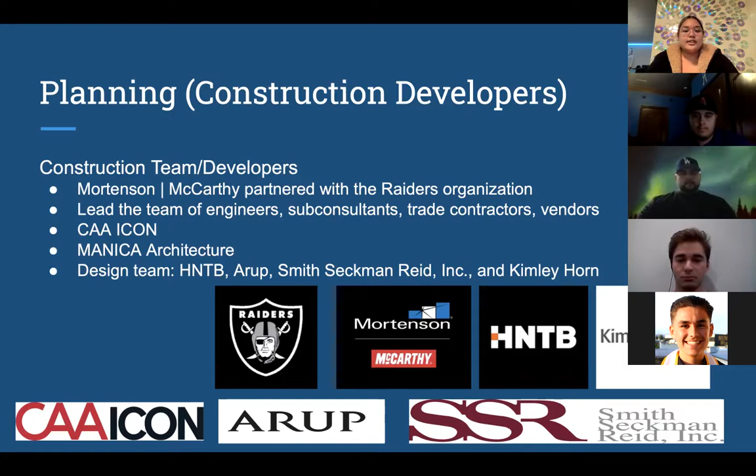For the permits, insurance, and building construction: for a construction project of this magnitude, with an estimated $1.97 billion invested, on a lot of 1.8 million square feet, the state lawmakers of Nevada had to vote on the proposal of building the stadium. Governor Brian Sandoval, governor of Nevada from 2011 to 2019, convened a special legislative session to consider the stadium proposal.

The permits obtained were from Clark County and had to comply with the LEED requirements. LEED stands for Leadership in Energy and Environmental Design, which is a huge factor in how new projects of this size are being built. I did not find any specific permits that needed to be obtained for a job this scale, but I can only imagine the extensive list of permits required.

There was 750 million out of the 1.97 billion dollars that was public funding from municipal bonds issued by Clark County, and the bonds were backed by proceeds of a special tax issued on hotels surrounding Las Vegas. So essentially the tourists were the ones paying for this to be built.

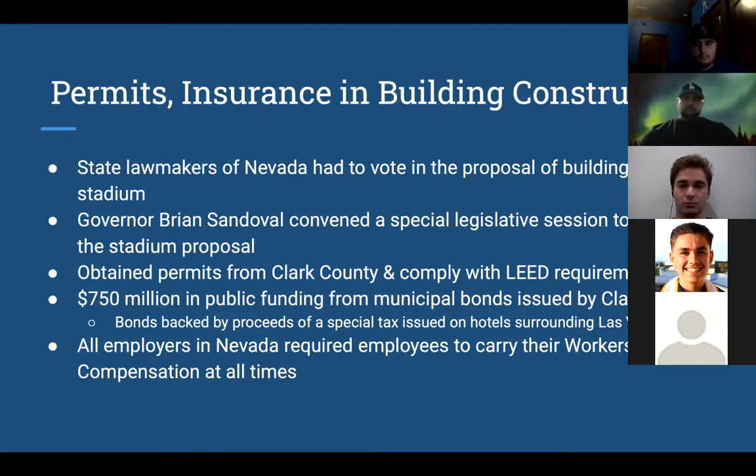For the site preparation and excavation, it required the blasting of caliche rock with dynamite to excavate and create the stadium bowl. Caliche rock is a sedimentary rock, basically a hardened natural cement with calcium carbonate that cannot be dug, so instead it needs to be blasted with dynamite.

This material can be found in the high plains of the western U.S. and other parts of the world, such as Australia, the Kalahari Desert, South Africa, and South American countries like Chile.

The dynamite explosions to excavate took place every day for nearly 2 months, with 300 holes drilled per day, moving 850,000 cubic yards of dirt. That's pretty much close to 18,000 holes blown up overall.

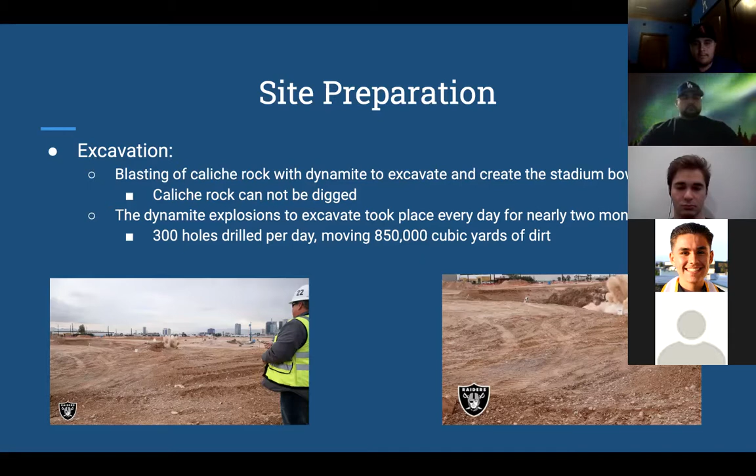For the site inspection, the stadium sits on a 62-acre site on Russell Road and Interstate 15. It's located in an unincorporated town within the Las Vegas metropolitan area, totaling 1.8 million square feet overall on where it sits.

As discussed on the prior slides, it was a joint venture with Mortenson Construction and McCarthy Construction, which carried out the whole development from start to completion. The utility lines were 30 feet deep from the stadium field elevation, with miles of piping and utility systems.

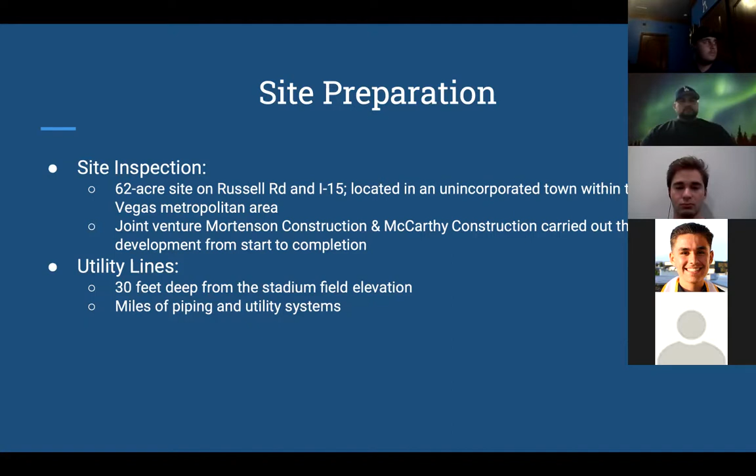The Allegiant Stadium is located near the world famous Las Vegas Strip in Paradise, Nevada. Geographically, it sits in a basin within the Mojave Desert and is surrounded by dry mountain ranges. This makes the climate mildly hot and dry.

The Allegiant Stadium was built on the desert. The stadium required the removal of 895,000 cubic yards of dirt.

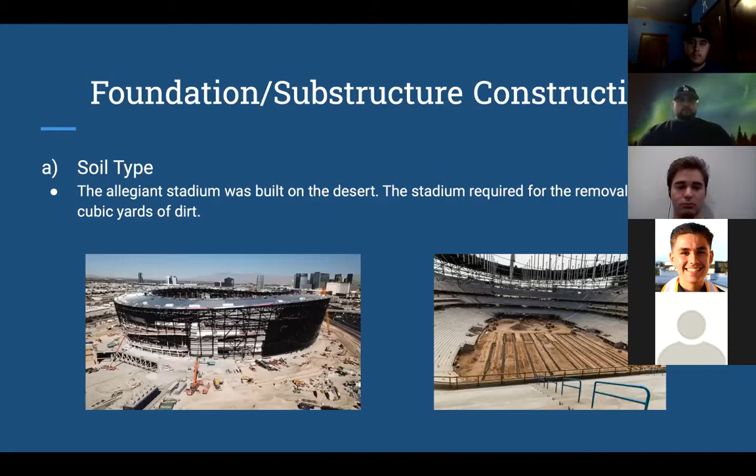The construction of the Allegiant Stadium began in November 2017 and finished December 2020, taking approximately 3 years to build. It required the removal of 895,000 cubic yards of dirt, the installation of 12 miles of concrete drilled shafts, and miles of piping and utility systems.

The roof was built with 100 stainless steel cables that created the structural diaphragm of the roof. The cable net system supports the steel structure of the fluorine-based ETFE roofing system. This roofing system provides an outdoor experience without exposing fans to the intense heat of the Nevada desert sun. The stadium also comes with a retractable field that contains an irrigation and drainage system.

Overall, 19 construction cranes were used throughout the project during the installation of 28,000 tons of structural steel, 105,000 cubic yards of concrete, and 482,000 structural bolts. Fun fact: the 28,000 tons of structural steel used to build the stadium is heavier than the Statue of Liberty.

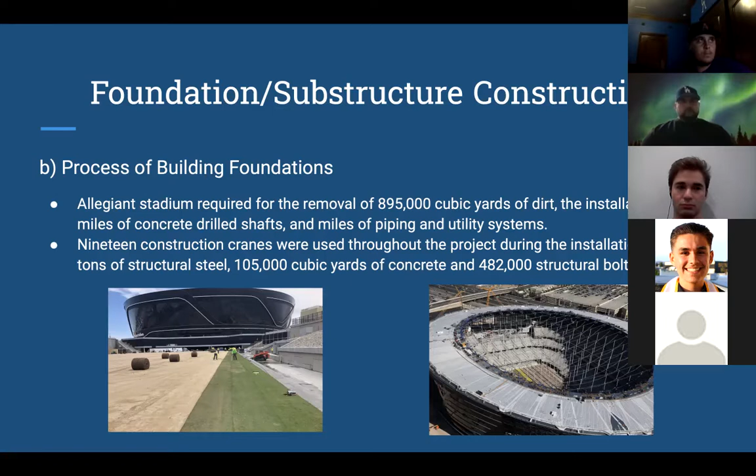The roles of the contractor: the builders were, as stated before, Mortenson Construction and McCarthy Building Company. The design architect was Manica Architecture, and the architect of record was HNTB.

Overall, Mortenson McCarthy performed all structural concrete, including foundations, walls, column cores, slab on metal deck, and slab on grade. The Allegiant Stadium was one of the fastest modern NFL stadiums ever built.

Mortenson and McCarthy used a team of 200 firms and digital modeling to be efficient and provide the best performance. The job was finished by the expected deadline due to technology-enabled construction techniques and effective collaboration among project team members. The Allegiant Stadium was built using a design-build approach.

This meant that the owner contracts with one entity instead of the designer and builder separately. This provided collaborative recommendations that fit the schedule and budget, and potential changes are evaluated by the entire team, leading to group-focused problem solving.

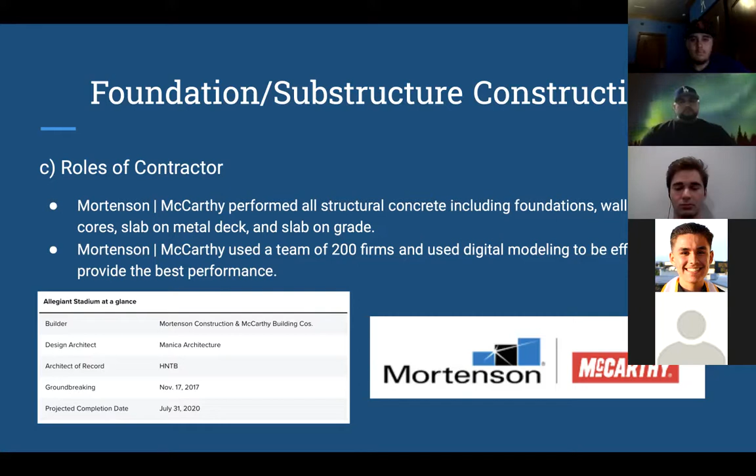Now moving on to the superstructure, which consists of 4 elements, starting with the electric and water line connections. As mentioned before, 895,000 cubic yards of dirt was excavated, there were miles of piping and utility systems, and 482,000 structural bolts used on this stadium.

Self-performed all the structural concrete, including foundation walls, columns, cores, slab on metal deck, and slab on grade. There are 1,111 toilets in the whole stadium.

There are 44 escalators, 2,200 TVs, 75,000 square feet of video boards, 95,000 square feet of field event space, and 100 yards of turf for the field, obviously.

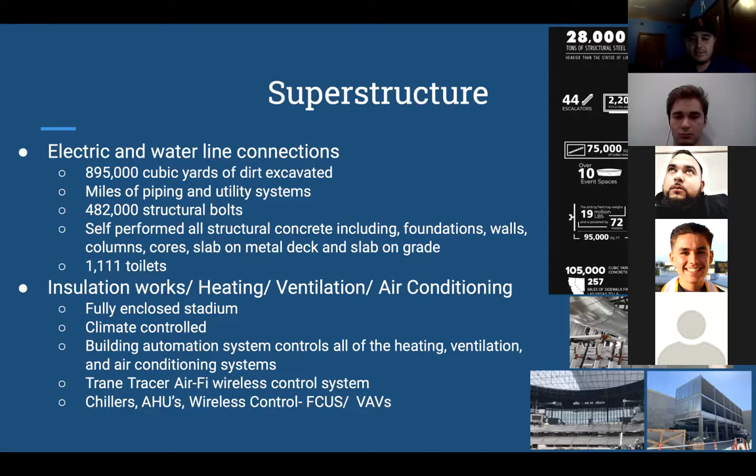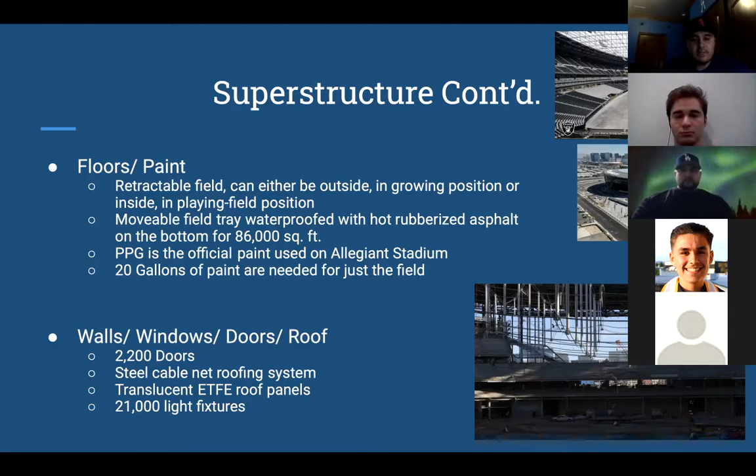So implemented here, first of all, the biggest element that basically no other stadium has is a retractable field, and then a stadium tour so you guys can get a better picture of what the stadium actually looks like during construction as well.

So this is the retractable field.

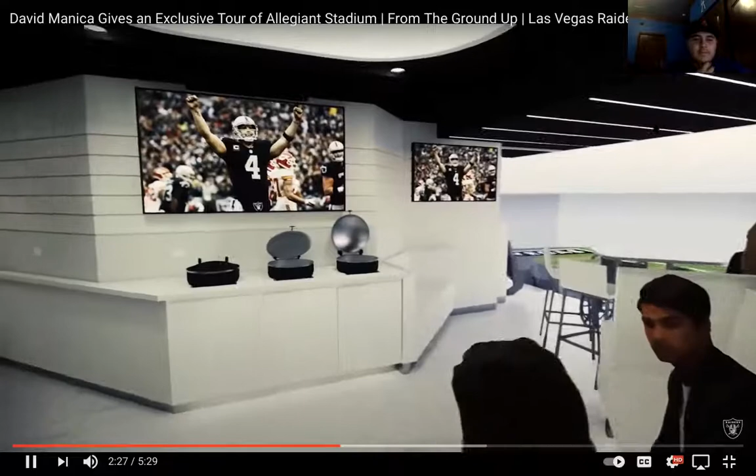All right, since the recording isn't really working, I guess I'll just talk through it. So right now he's just showing the suites and how they designed it to make it a little bit more spacious while still including a lot of suites, because the owner actually wanted a various amount of suites for fans to get a luxury experience.

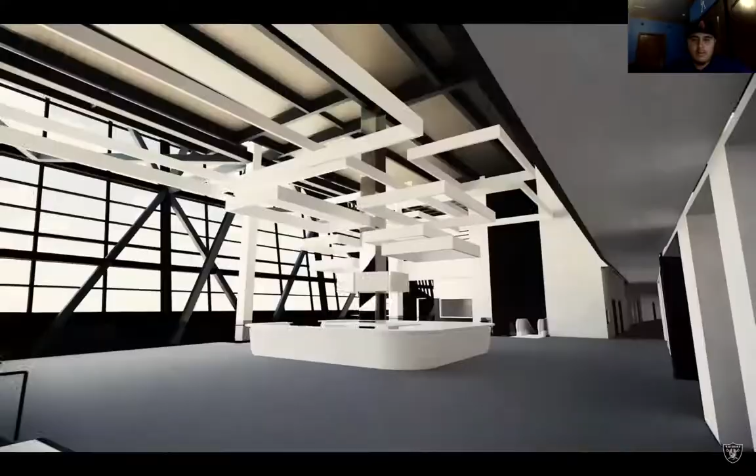So here what we can see is the field level, and these are just the designs. I mean, you could tell that that's luxurious as well.

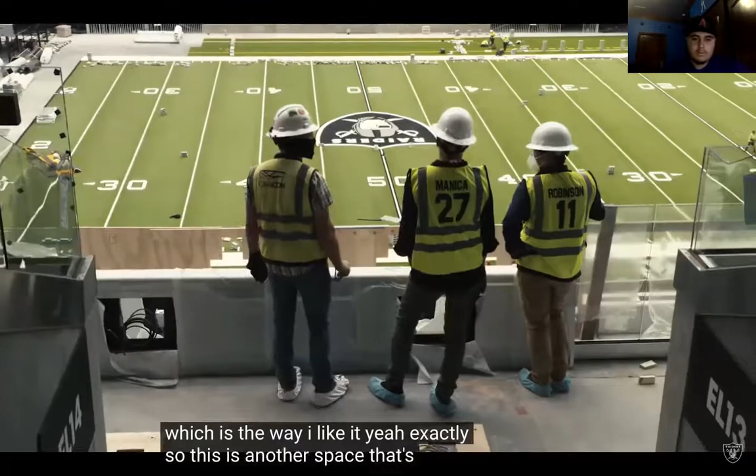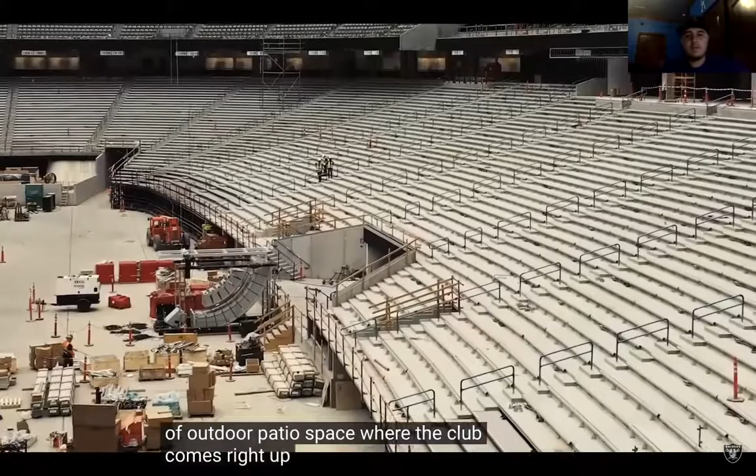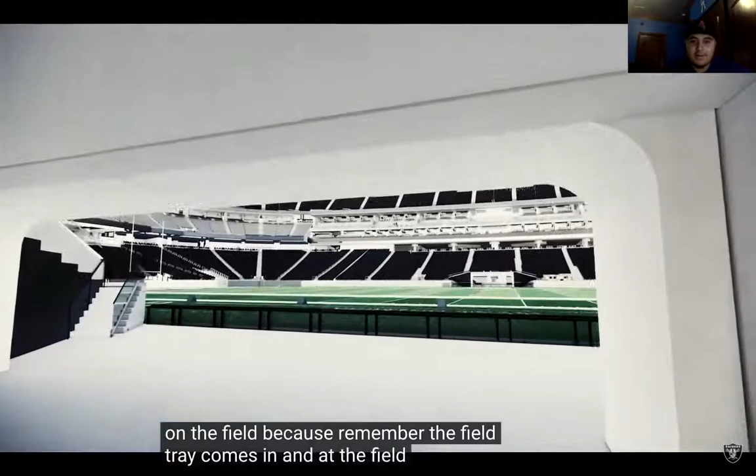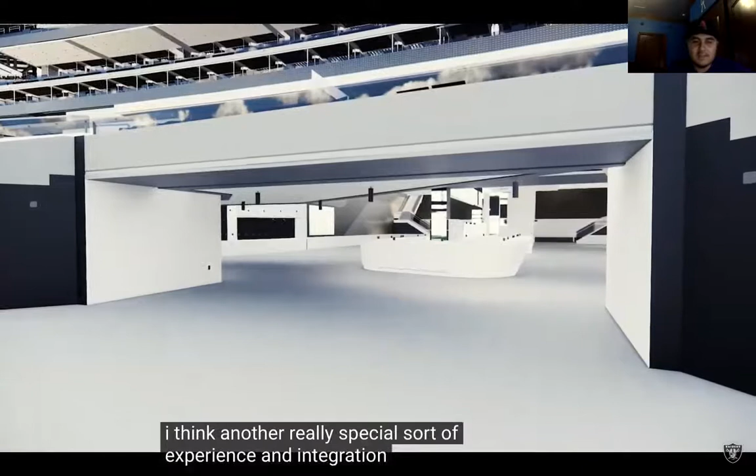So where they're standing now is actually the field level suite, which is at the same level as the field, so fans can get that experience or feel like they're actually in the game. Since you're at the same level as the players, it might feel like you're standing right there next to them, and that's something the owner specifically asked for as well.

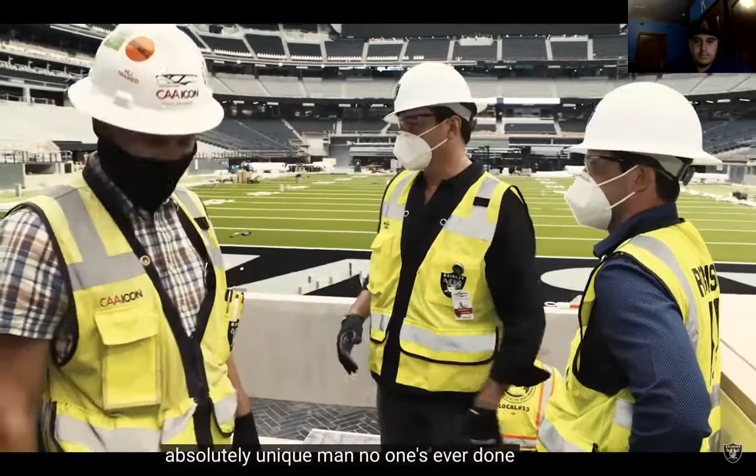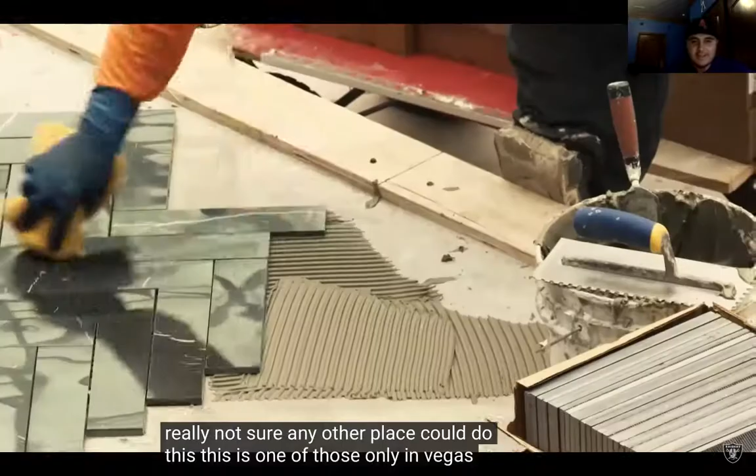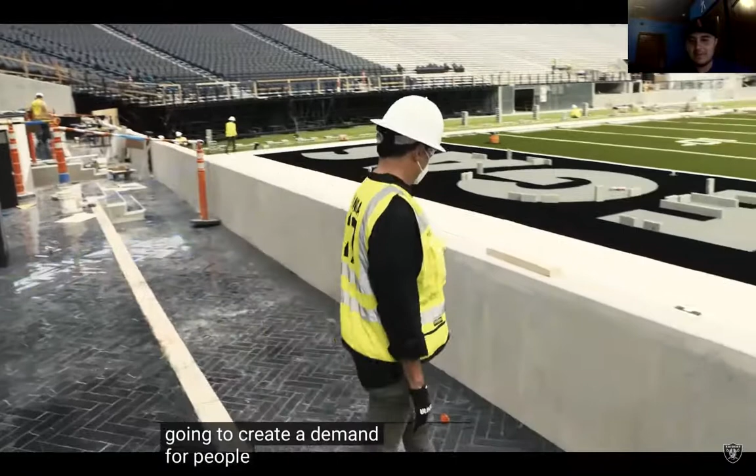Now where they are is the end zone. Those are also suites, and what they wanted to implement here is basically getting fans as close as possible. On that wall right there, people are actually going to get to stand, so if you're standing there and go get a drink, someone's going to take your spot right away because it's going to feel like they're on the field and they want that experience.

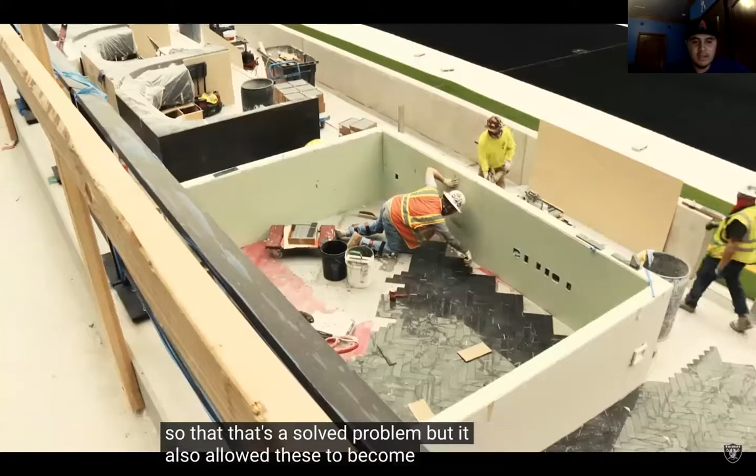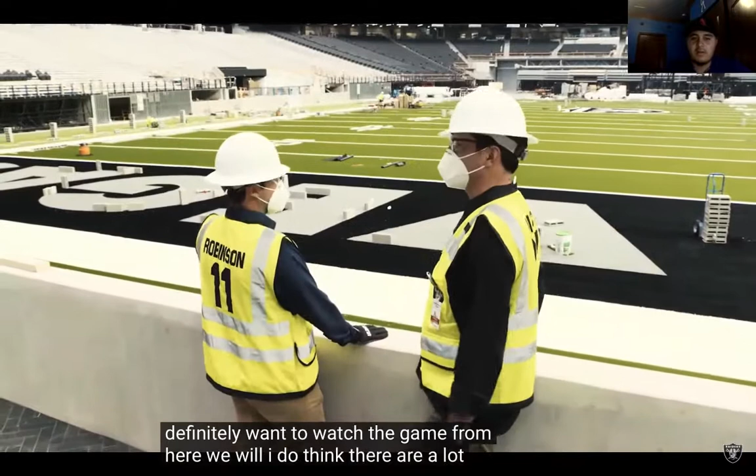As you can tell, and like they mentioned in the video as well, basically all of the little details like the tile and anything else featured in the stadium are kind of black and white or black and gray, like the Raiders, because they really wanted to implement those colors just to make it known that it's the Las Vegas Raiders stadium.

All right, so for the punch list, we have the stadium features. We already know there's 19 million pounds of retractable rolling natural turf, 28,000 square feet of operable walls, 127 suites, 8,000 club seats, as my partner was describing.

One of the crazy things to think about is it took over 5 million craft hours for the whole construction process. We're talking about the whole amount of concrete poured into the infrastructure. There's 257 miles of sidewalk, from Las Vegas to LA.